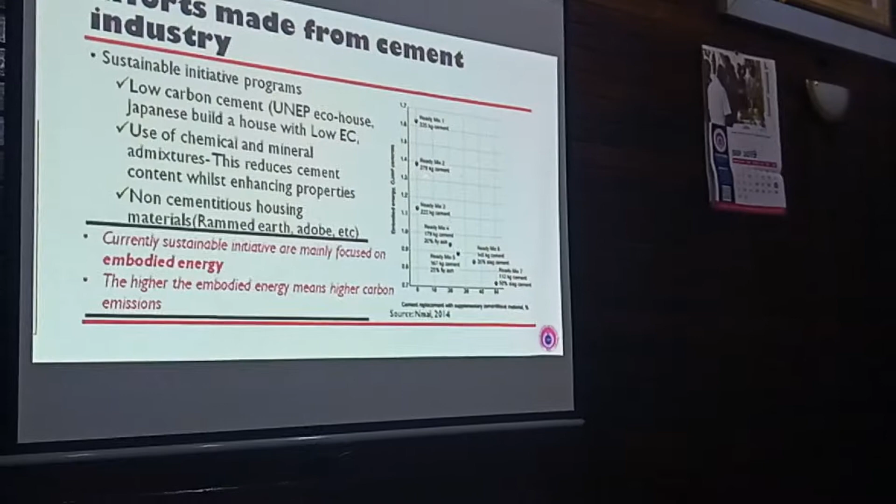So I presented these things many years ago here, but I think it's still very important to show. Now the Portland Cement Association did a research where they compared concrete without admixtures with concrete with admixtures. So if you go to the top here, you see that we have a ready mixed concrete containing about 335 kilograms of cement. Now this one too is a ready mixed concrete containing about 279 kilograms of cement.

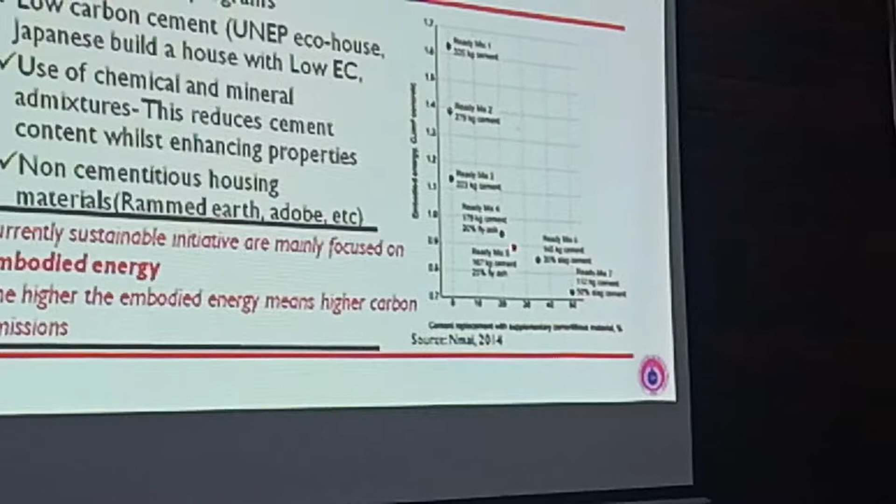But then if you come here, they replaced the content of cement with about 20% fly ash, and look, the embodied energy was less than 1.0, as compared to this one, without anything. Don't forget, I'm saying that embodied energy is related to carbon dioxide emission. So you can see from the graph that as the percentage of the replacement increases, the embodied energy decreases. For example, at 35%, the embodied energy of the material is below even 0.9.

So it means that if I try to use certain forms of mineral admixtures in concrete, I can bring down carbon dioxide content. So that is the point. Now the motivation of the study, I'm saying that 40% you see. You know, clay pozzolan in Ghana started from BRRI. A lot of research has been done using 30% of clay pozzolan to replace cement.

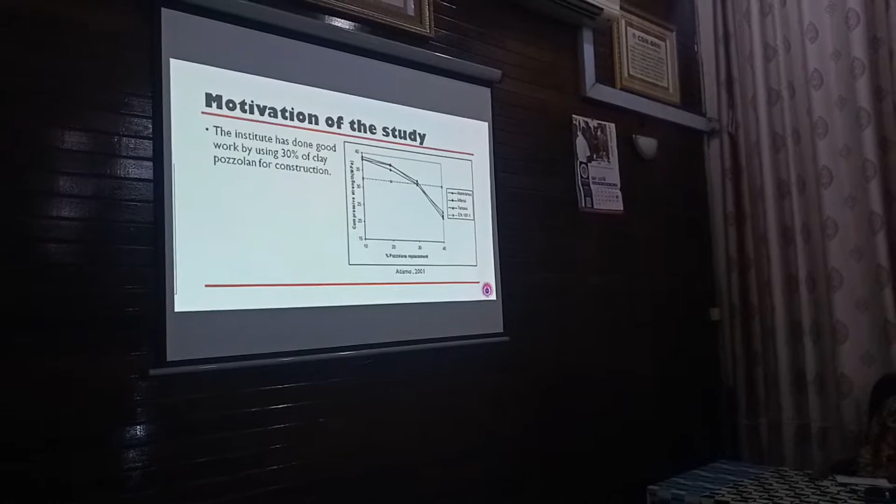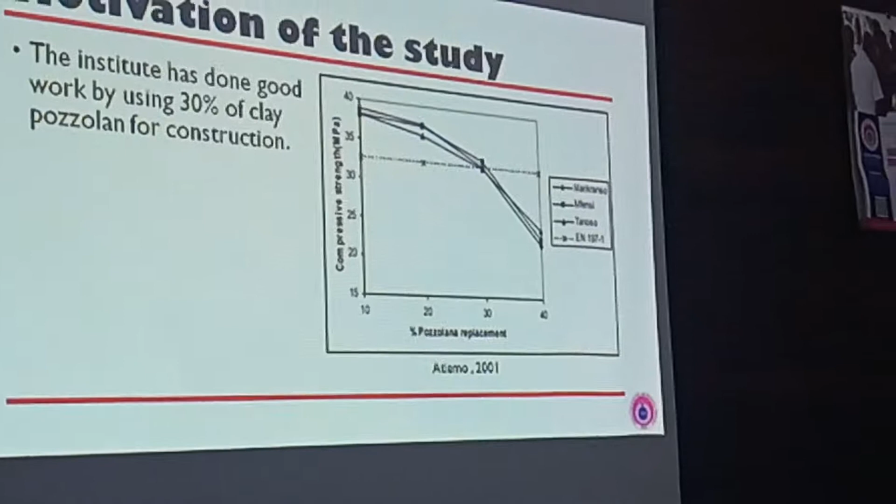Now this is a work that was done in 2001 by Atiemo, and you see that he used Mankranso, Mfensi and Tanoso. So that is the common type of clay that is available in this corridor. In this research, you realize that the best performance was around 30%, which met certain criteria, about 32.5 class of cement. So it has been the norm. I mean, we've been using 30% of pozzolan to replace cement.

So the point is that if you go to other countries, now they are talking of performance-based cement. So out of performance-based cement, they've come out with different classes of cement. You can have stucco cement, masonry cement, mortar cement, grout cement, all kinds of cement. So what they do is that they pick a pozzolan and then try to replace it as high as possible, and pick the standard and see if it falls within the standard. When it falls within the standard, they are ready to go. Then you can use it.

So this is a typical standard I picked. This is ASTM C91. This is typically for masonry cement. Now when you come to masonry cement, forget about the fineness, the time of setting. The most important thing that is very critical is the compressive strength. So at 7 days, now we have types of masonry cement. We have type N, type S, and type M.

So if I'm in the United States and I go to the shop, I want to buy cement, there are various categories. I can buy type N class of cement and go and use it for my plastering. I can also buy type M class of cement and use it for my plastering. So it's not only about Portland cement, there are different categories of cement. So you see that with type N, we have 7-day strength to be about 3.4 megapascals, and then 28-day strength, which is the ultimate strength from many standards, gives you 6.2.

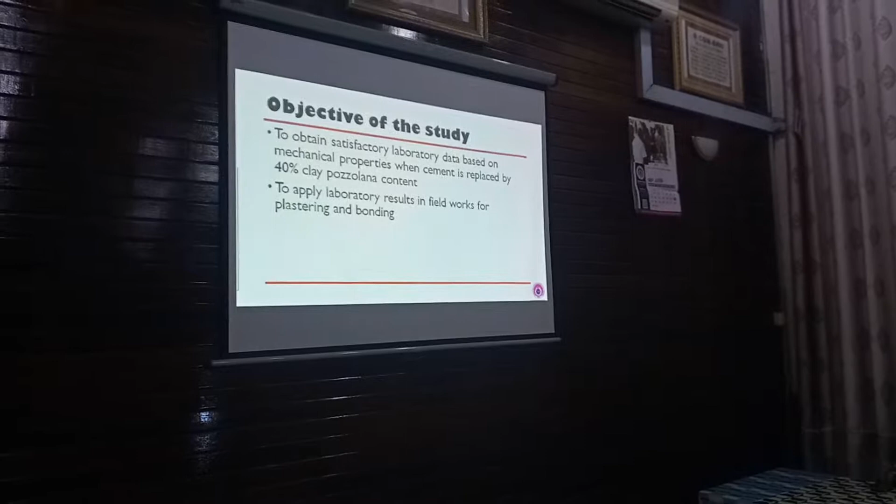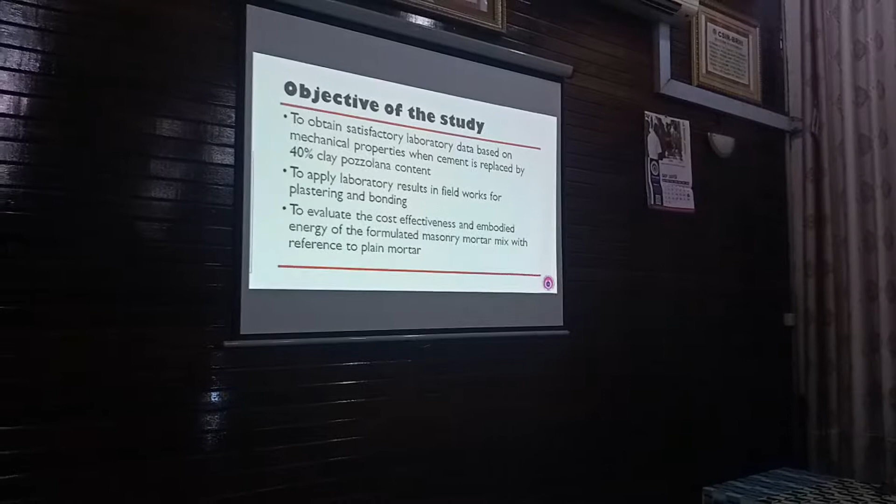So for the objective of this study, I have three objectives. One, to look at using 40% pozzolan to replace cement and see its performance. And then two, after doing these things in the lab, I try to apply it in the field for plastering and bonding. And then I look at the cost effectiveness and the embodied energy of the material that I will produce. Is it really cost effective? Can I really bring down the carbon dioxide in the material produced?

So these were the materials that I used. Portland cement, normal grade 42.5 R. Then I used the clay pozzolan. We produce it in the factory. Then I sieved the pit sand. Now SNF means sulfonated naphthalene formaldehyde. It's a chemical admixture. So it is a water reducing chemical admixture.

What it does is that if you are going to use a high content of water in your mix, every civil engineer knows that water content is a devil in concrete. The higher the water content, the lower the strength. So if you are able to bring down water content, it means that you can achieve higher strength. So the SNF does that. It's able to cut down water content and enhance workability. And then normal water. So these were the pictures. This is the SNF material that we used.

So let's look at some of the properties of the material. I have Portland cement and I have clay pozzolan. Now we have the physical properties. With this kind of work, it is always important for materials engineers to look at the chemical properties, because the chemical properties give you an idea of the performance of cement.

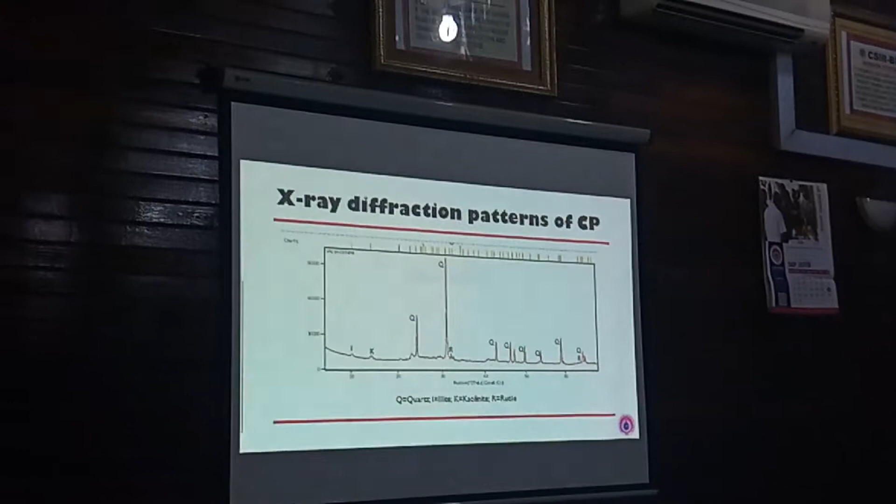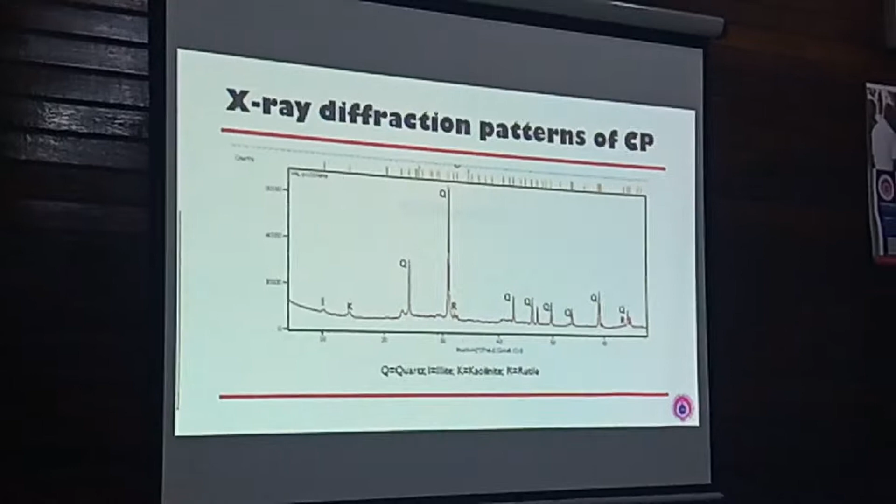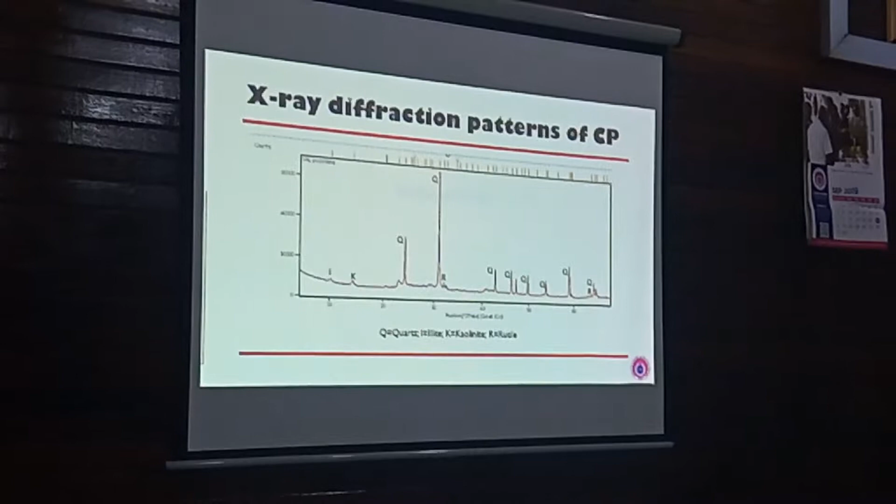Now here, the nature of everything tells me that the material is very crystalline. When I say it's crystalline, it means that it is well arranged, and so its reactivity will be a little bit hard. But I can't base my final conclusion on X-ray diffraction analysis. Though it's crystalline, I have to subject it to other forms of analysis. I'm just mentioning these things so that if you come across them anywhere, you can appreciate them.

Okay, so these were the methods that were used for the study. Pastes and mortars were prepared by replacing cement between 10 and 40%. These were the labels that I gave them. You have the control mix, and then the control mix replaced by 10% of pozzolans, 20%, and so on. We produced the paste for the setting times, and the mortar for the strength. Then we crushed it per standard practice, ASTM C109.

I did a little bit of economic analysis from the strength results I obtained. Then I did a calculation of embodied energy. Some of the equipment used is available in the civil engineering lab. We have the flow table, 2-inch mortar cubes, the universal testing machine for strength, the setting time equipment, that is the Vicatronic, and some weighing scales.

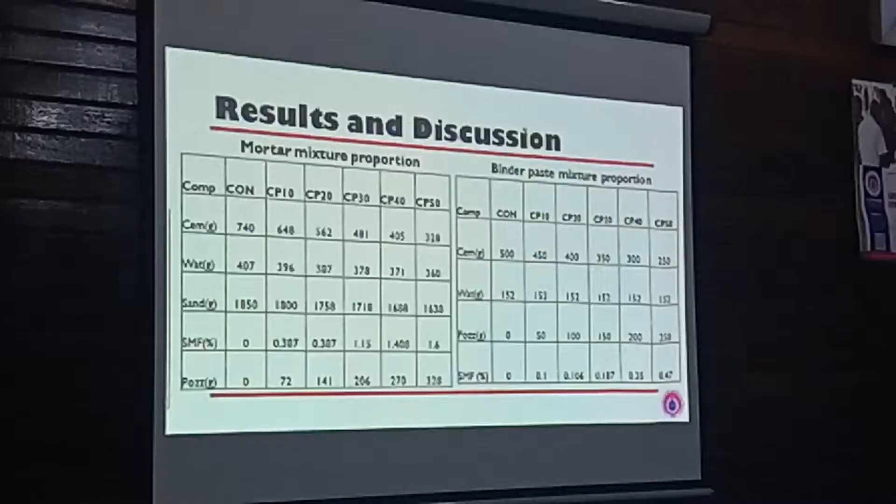Now the results. These were the mix proportions. For the mortar, the mix proportion in grams is shown here. The point of interest is that the water was reducing as the percentage of pozzolans was increasing. In the same way, the sulfonated melamine formaldehyde I introduced also increased. It means that the pozzolan I used is more or less very porous, and when the material is porous, it will attract more of the admixture.

But don't forget that I'm trying to reduce water content to achieve a high strength. When the water content is too high in a cement mix, the strength comes down. So that is the balance I'm trying to strike. And this is the formulation for the binders. It's always important to show the masses of your mix. Sometimes people present percentages, but it's better to also show the masses you've used.

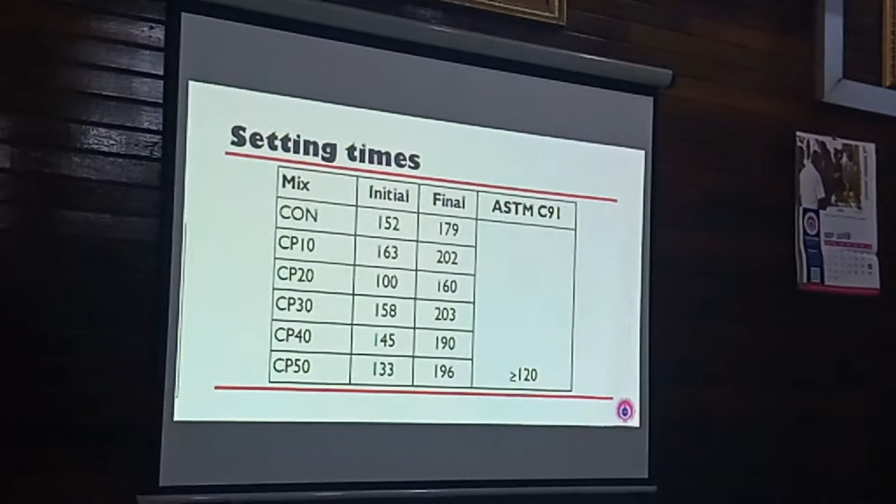So these were the results of the setting time. I wasn't so much interested in setting time, but I wanted to get an idea of the material, because setting time gives you an idea, for example with initial setting time, of when, after I add water to cement, some form of interaction starts.

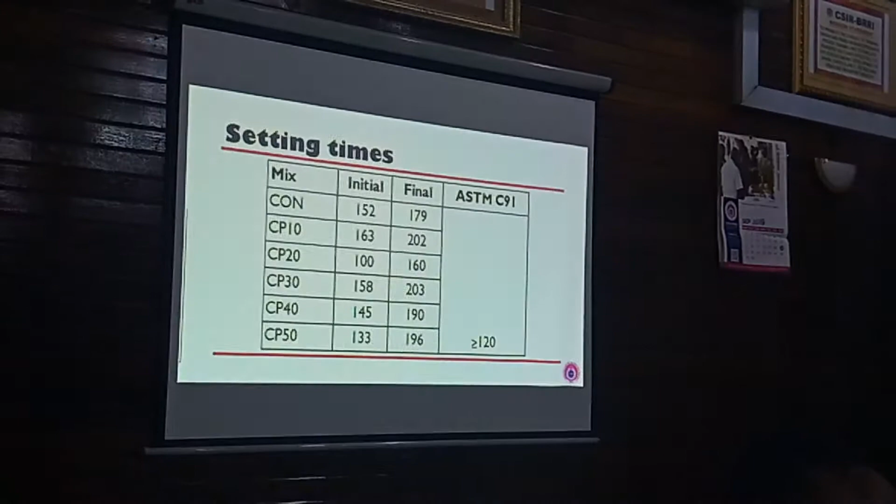When I talk of initial setting and final setting time, it means that when I added water to cement, there was some interaction between one powder material and the other powder material, so they started to bond together. Now, at final setting time, it means that when you are using cement in the field, you can't work on it. Before you achieve the final setting time, the cement should be workable. When you achieve the final setting time, you can't work on it.

So if you are an engineer, you can know that, okay, the cement I'm using has a final setting time of, let's say, 196. So if they make the mortar mix or the concrete mix and it sits there for about 196 minutes, you know that you can't rework it. Even if they add more water to it, it's still bad. So it's very important to know your final setting time.

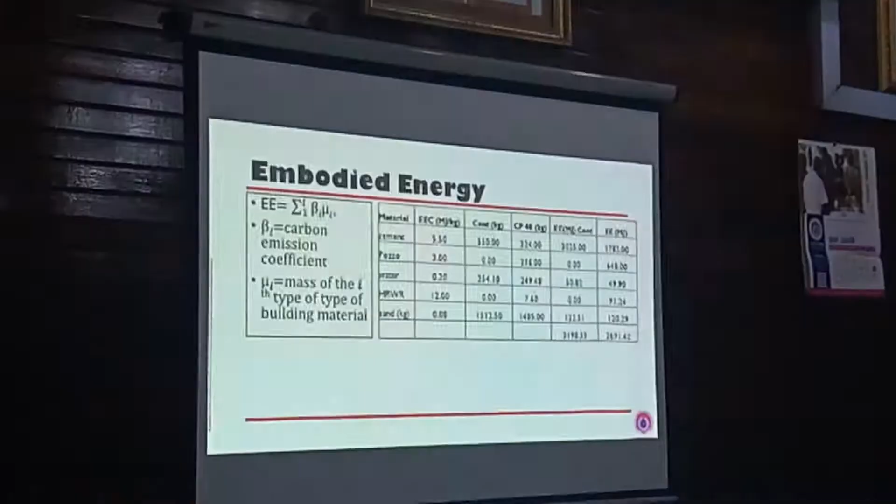The good thing is that many years ago, the UK government released a big fund for the University of Bath to build a database of embodied energy for materials. So all over the world, everybody uses that database for their calculations, unless the Ghana government gives us money to go into the lab to develop our own database. So this is the data that I picked. The embodied energy coefficient for cement is 5.5 megajoules per kilogram. So if I'm producing cement, it is 5.5.

But let me also state that embodied energy is influenced by transportation. In this case, I removed the transportation scenario from the calculation. For example, look at cement importation to Ghana. Where is it coming from? Cement is coming from Europe. So the distance from Europe to Ghana influences embodied energy, because they are burning energy to bring in the material. But that is a little bit complex, so I took it out and stuck to the material.

Now when we come to pozzo, the embodied energy of clay, baking of clay, is 3.0 megajoules per kilogram. The embodied energy of water is 0.2 megajoules per kilogram. And then the embodied energy of the chemical admixture, that is the high range water reducer, is about 12.0 megajoules per kilogram. So if I do the calculation based on this embodied energy and the masses of the material, now the masses of the material is per meter cube. So if I do it, this is what I'm achieving.

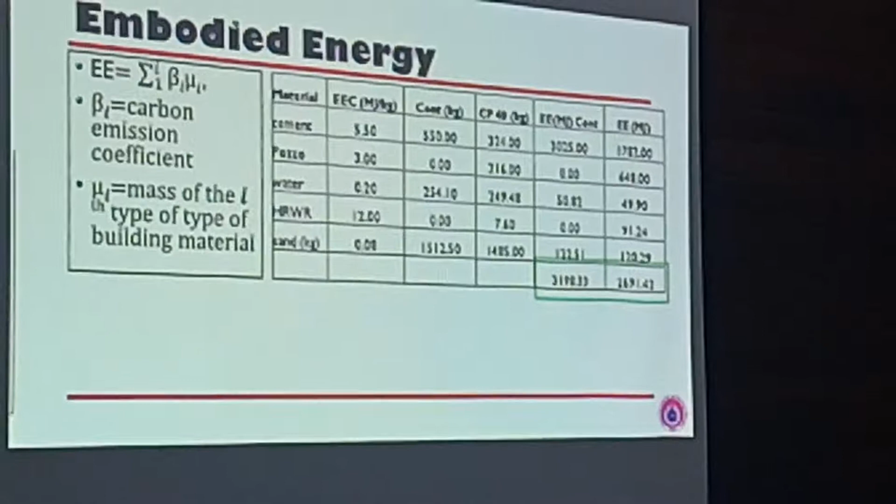So the embodied energy for the control, that is the mortar mix without the pozzolan, was giving me 3,198.33 megajoules. And the embodied energy of the one that I used 40% to replace is giving me 2,691.42 megajoules. But don't forget, I have stated that embodied energy has a direct relation with carbon dioxide emission. So the higher the embodied energy, the higher the carbon dioxide emission. So of course you can see from this table that it is very good to introduce the pozzolans into your material because the embodied energy comes down.

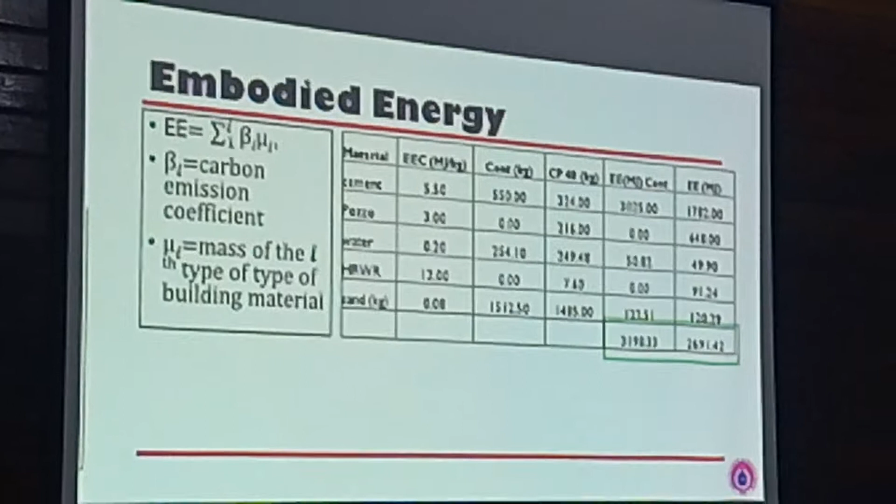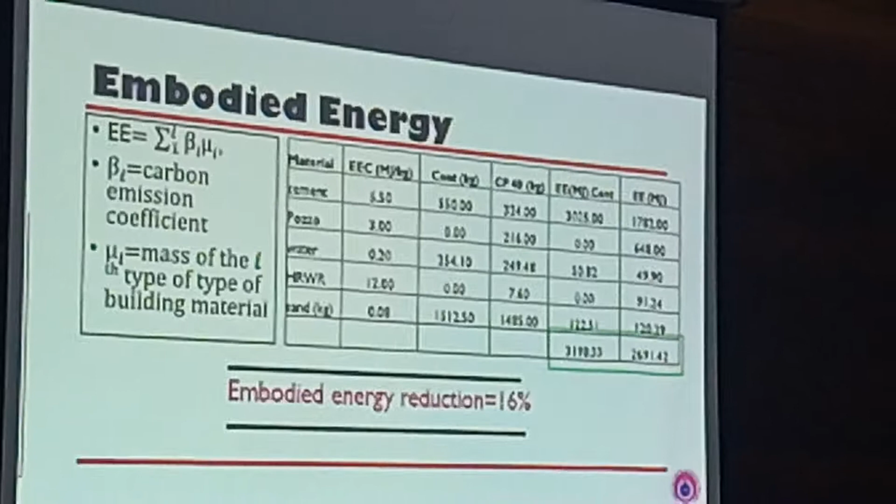So we will see that the embodied energy reduction between the two was about 16%, which is very good. Many years ago, a president in the United States was trying to even bring down the embodied energy of coal in the US by about 1%. And they were saying that if they reduce it by 1%, it's going to be very healthy for the Americans. So if you can do something to reduce the embodied energy of the material by about 16%, then it means that you can make a good case for sustainability.

So it means that the volume of the mortar that I will be producing in the field will be 10 cubic meters if I look at the area and then the thickness. Then the content of the binder that I will use from the ratio is 1.43 meter cube. So in the field, it is known that 29 bags of cement can produce 1 meter cube of mortar. So from these things and the calculations, you can estimate the content of pozzo, which is about 40%, to be 17 bags, and then the cement content 25 bags for the work of 500 square meters. So that was the basis, and that was how the calculation was done.

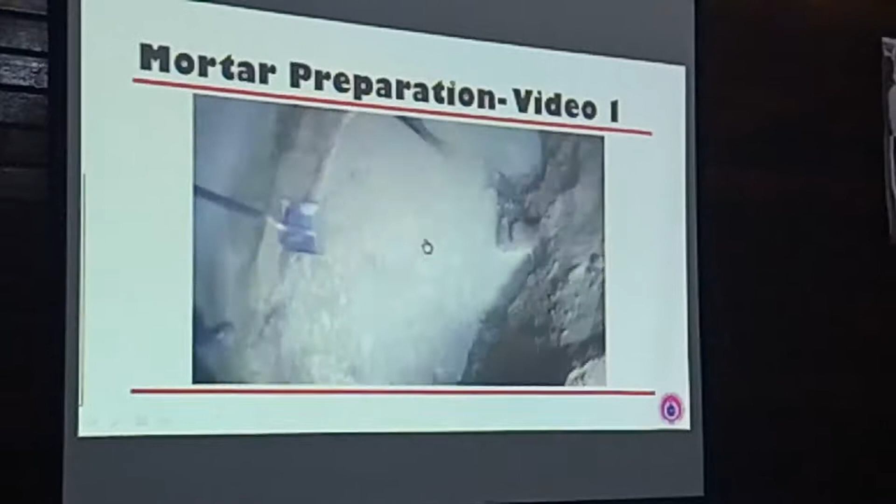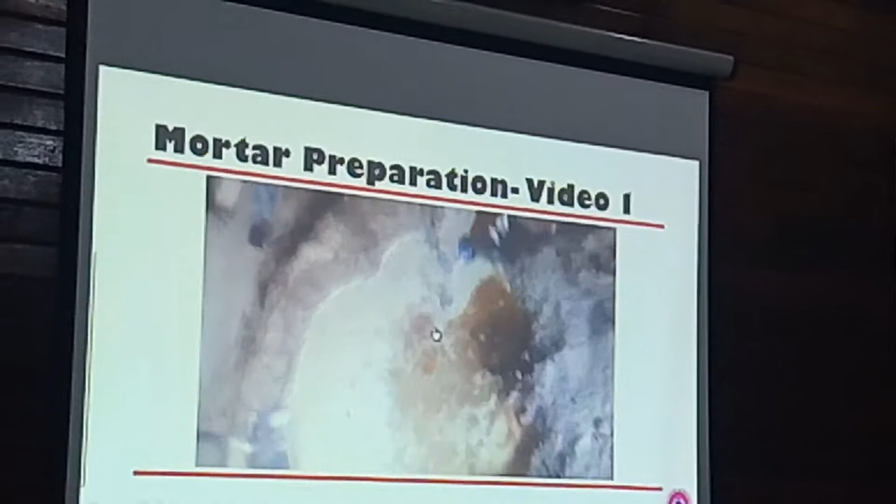Okay, so this is a video that we can appreciate from the field. So this is a field work. There, I tried to do all these mixes for them, and they formulated everything, the mortar, the sand, and then the pozzo. What I did was that because I knew that 40% was okay, I contacted the factory manager and I formulated 40-60% of the pozzo cement from the factory. And then I sent it to the field. So they are pouring the chemical admixture into it. The chemical admixture, I tell you, is the game changer. It changes a whole lot of things. Yeah, so this is how it was applied.

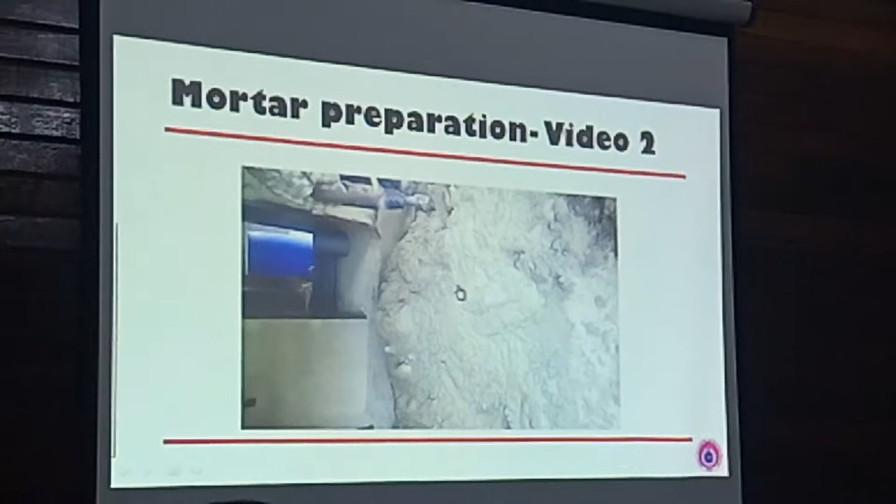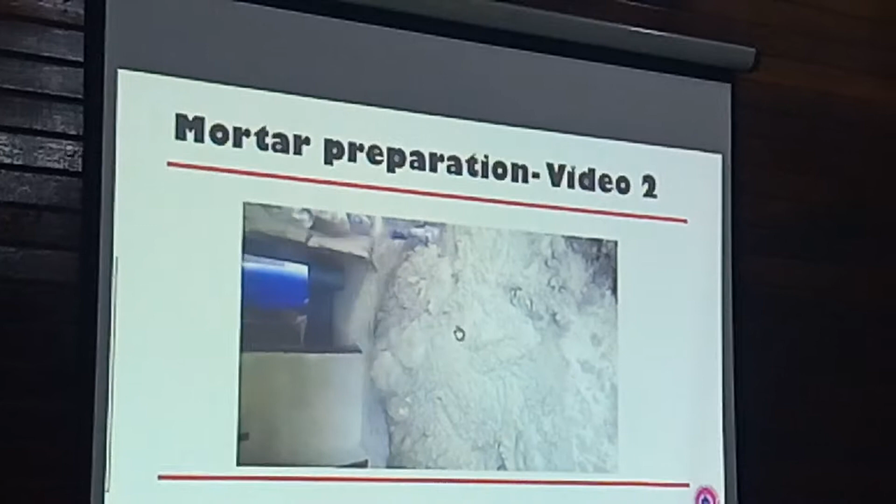Now, this is also another video when they were mixing it, just to indicate to you that it works. It really works. So the masons were trying to mix it. The point is that in Ghana we don't use much mechanized equipment, but if we are to use mechanized, like a concrete mixer for the mortar, you can easily go even up to 60%. But here the errors are a lot, so I try to limit myself to 40% because we are mixing everything on site.

So this is the plaster that I did. It came out so well. And the mason told me that this is the first time he's working on a project and he didn't see any crack. I'm telling you, I'm not joking. He didn't see any crack in the work. And the plaster was so nice, was so good. It was cool. I reduced the costs and everything, and everybody was happy to use it. Okay, so that is to demonstrate to you how practical the thing is.

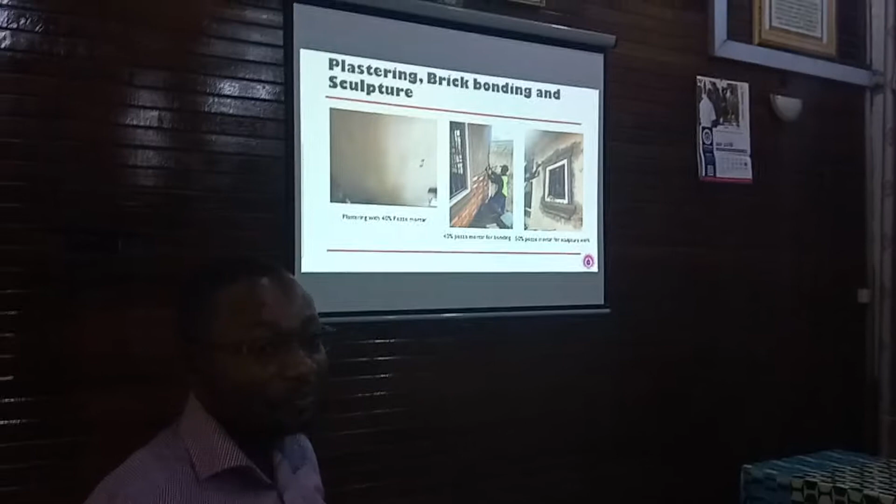Okay, so we did plastering, and then what about the bonding? This is the plastering work I showed a video of. So this is the bonding. We used the cladding to bond it using the same mix proportion, and I'm telling you, it came out very well.

Now the interesting thing about this work was here. They call this one sculpture. In the field, they mostly use cement to do sculpture. So I told the guy doing the sculpture, listen, I'm going to reduce your cement costs. I'm going to bring you a cement which is not 36 Ghana cedis; I'm going to give you a cement that is about 26 Ghana cedis. Are you okay with it?

So I came to the factory and formulated 1:1 for him, and he used it for this work. This is a practical work. He used it for the sculpture work. Then he came to me: oh sir, so it means we can do business. I said, oh yeah, we can do business. So now he is interested to use 1:1, not 40-60, but 50-50 for his sculpture work.

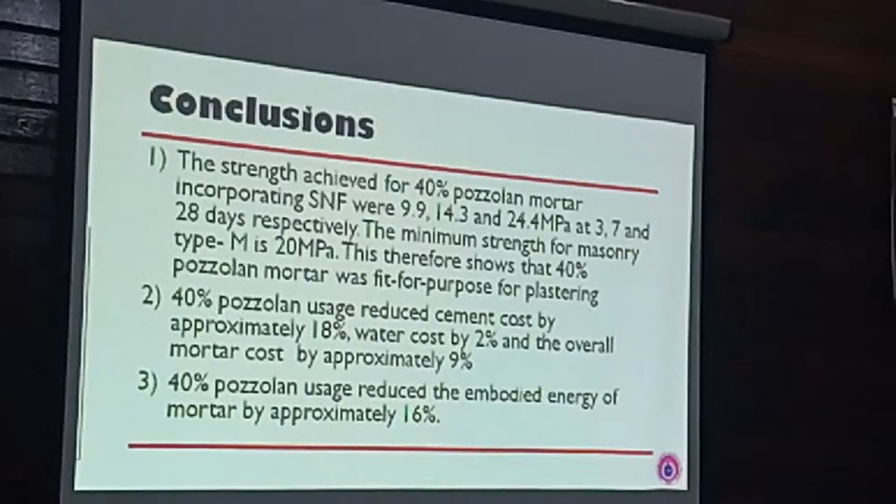Why sculpture? Because these are non-structural works. You don't need high strength to do sculpture works. So this is just to introduce to you what happened. Well, let me try to conclude. After walking you through embodied energy, cost analysis, strength, and all the practical experience that I did, these are some of the things we can conclude on.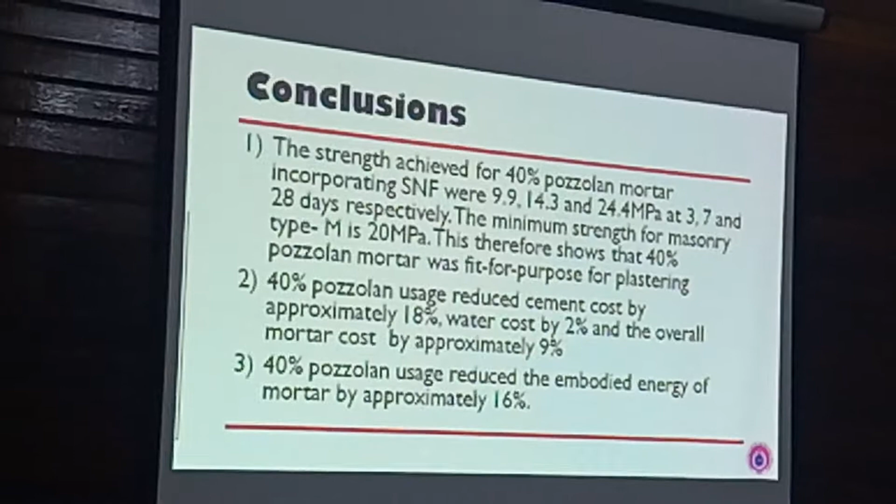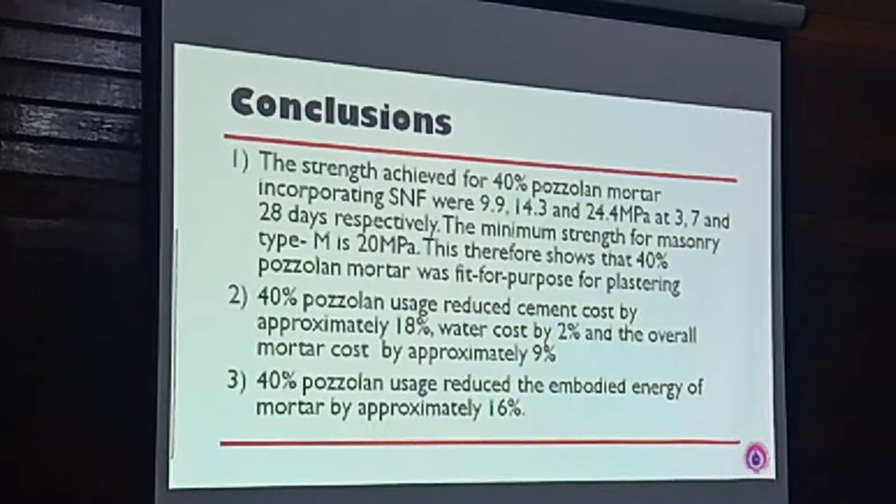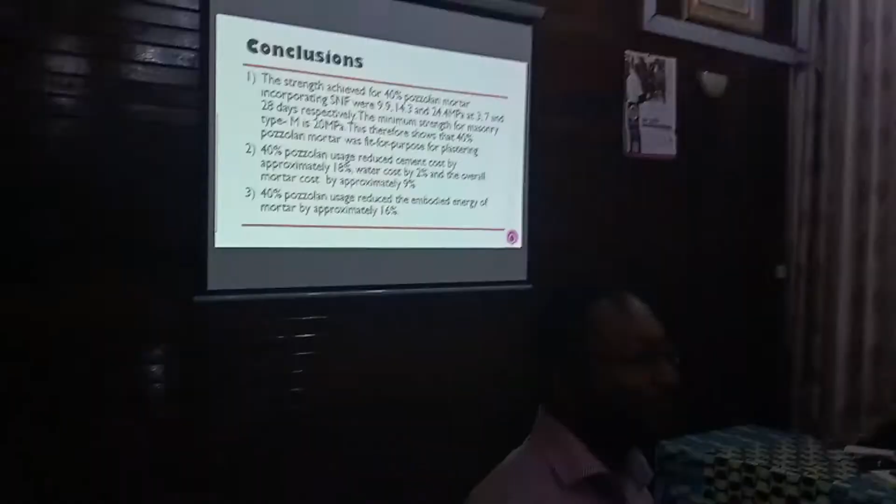At 40%, when you incorporate the SNF, the sulfonated naphthalene formaldehyde, the compressive strengths we achieved at 3, 7, and 28 days were 9.9, 14.3, and 24.4 megapascals. When you compare it to the standard, it is higher than the standard, so you can use it. Before the standard came out, they tried and settled on their value of 20. So there is nothing to repeat; you just apply the standard.

Now, the 40% usage reduced cement costs by approximately 18%, water costs by 2%, and the overall mortar costs by approximately 9%. At 40% pozzolan usage, the embodied energy of the material was reduced by about 16%. So these are the three strong conclusions I want to bring to the fore: embodied energy, cost reduction, and the strength of the material.